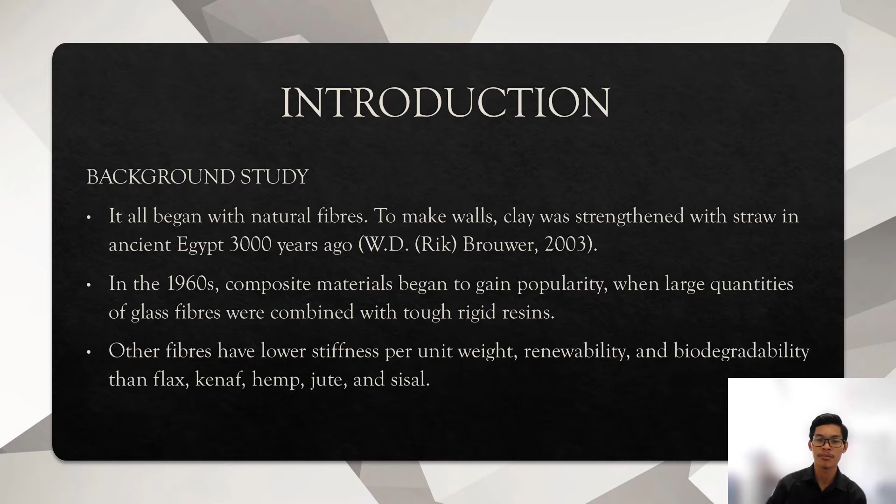Other fibers have lower stiffness per unit, renewability and biodegradability than flax, kenaf, hemp, jute, and sisal. Natural fibers are less expensive than synthetic fibers and may be used in application where cost trumps strength. Okay, next is the problem statement.

For this experiment, Bemban has a lot of potential. It is easy to find and can be found anywhere throughout Southeast Asia and mainly used for handicraft products as well as the tiles. Bemban plant has a lot of potential on becoming a good natural composite as kenaf and jute due to its high strength, high durability, high flexibility, and will not easily damaged by water. Regardless, there is no precise knowledge on how to correctly handle the Bemban plant.

To begin with, the Bemban plant has a few characteristics that make it a great natural composite. It contains minimal sap and it is simple to process. However, there are few studies to analyze on the strength, water absorption, flexibility, fracture, and failure process of the Bemban plant. So this study will be beneficial to the commercial and industrial sector when the strength, toughness, and the degradation factor has been known.

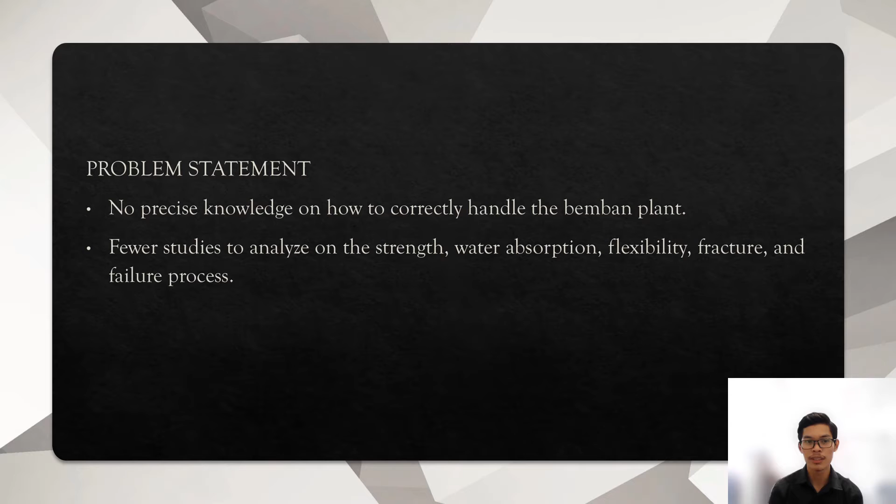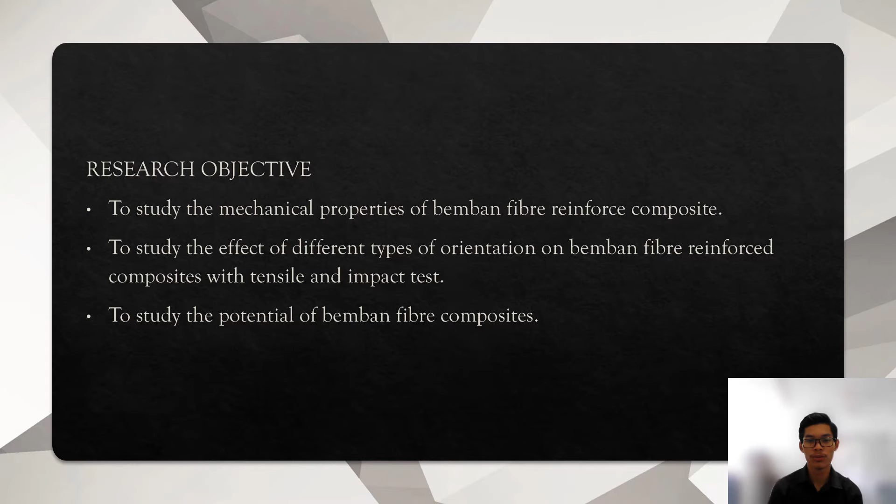Moving on to the next slide is the research objective. Basically, there are three types of research objective, which is the first one will be to study the mechanical properties of Bemban fiber reinforced composite. Second is to study the effect of different types of orientation of Bemban fiber reinforced composite with tensile and impact tests. And finally, to study the potential of Bemban fiber reinforced composite.

Okay, as for the scope of research, there are four, which is firstly the materials chosen for this experiment study are Bemban and thermosets. Next, this experimental study is focusing on three types of orientation of Bemban fiber reinforced composite, which is unidirectional, woven, and also random.

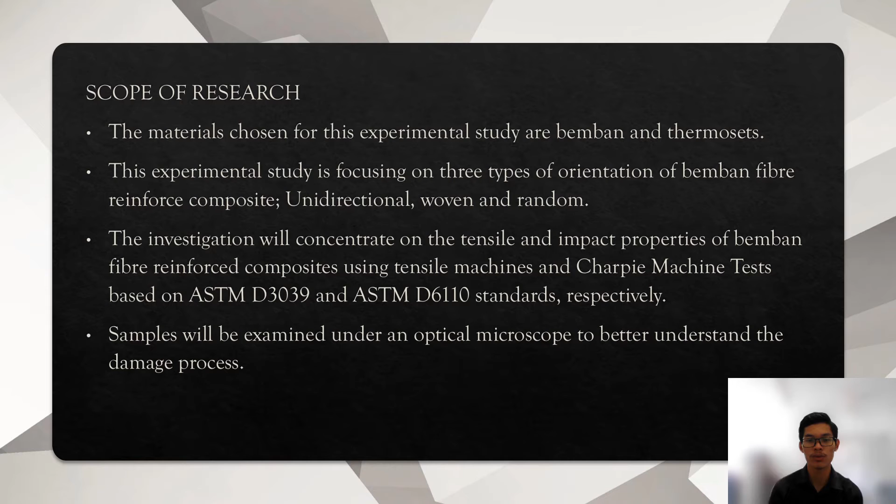The investigation will concentrate on the tensile and impact properties of Bemban fiber reinforced composite by using the tensile machine and Charpy machine tests based on ASTM D3039 and ASTM D6110 standards respectively. And lastly, the samples will be examined under an optical microscopes for better understanding the damage process.

Okay, for the literature review, I will explain about the first thing, which is the Bemban. So Akhmad Syarief in 2017 stated that Bemban is another type of plant from Marantaceae family that looks like a bamboo tree that grows in Malaysia. The morphology of this plant is that the leaves are oval in shape with parallel veins at the end of the stem and are green. It often grows in areas of shrubs where there is moisture suitable for clumping.

Although this plant is not considered as a food crop to be commercialized, the existence of this plant is always utilized by the villagers. At first glance, this Bemban tree is a kind of clump plant with a stem that looks like bamboo tree, but it has no segments. The relatively large oval-shaped leaves have a beautiful glossy surface.

The stem features a tall stem with the leaves located at the tip of the stem, where the flowers are white and produce a weak fragrant odor. The fruit is round and small in size. Fruits are globoid to ellipsoid in shape and slightly hairy and whitish in color.

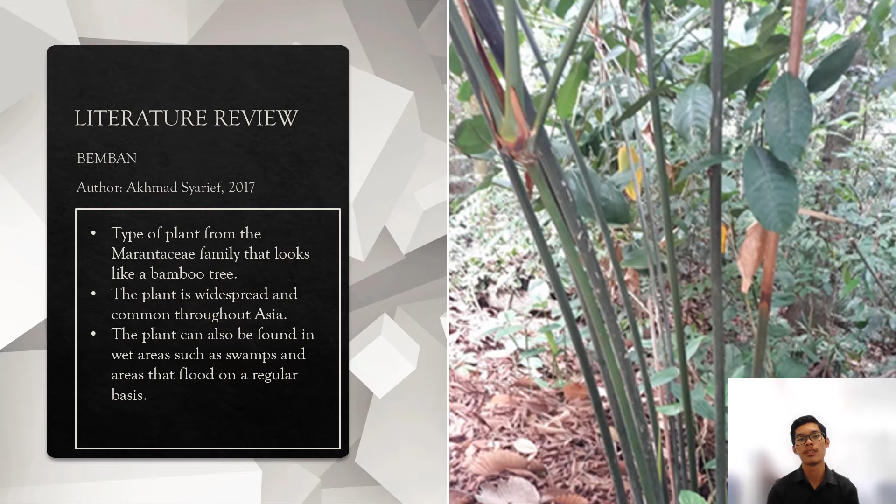It is fairly common, particularly in open and crowded areas. The plant can also be found in wet areas such as swamps and areas that flood on a regular basis. In Southeast Asia, it grows up to 1000 meters of altitude, not only in secondary forests, thick forests, and bamboo forests, but also in coconut plantations and near paddy fields.

Okay, next will be the composite. Ngo T in February 2020 stated that a composite material is a material that is made up of two or more materials that have better properties than the individual components when used separately. In contrast to metallic alloys, each material retains its own chemical, physical, and mechanical properties. The two components are reinforcement and matrix.

Composite materials have a high strength and stiffness mixed with a low density, allowing for a weight reduction in the finished item as compared to bulk materials. Strength and stiffness are provided by the reinforcing phase. Typically, the reinforcement is tougher, stronger, and more rigid than the matrix. Fiber or particulate is commonly used as reinforcement. Particulate composites have essentially identical diameters in all directions.

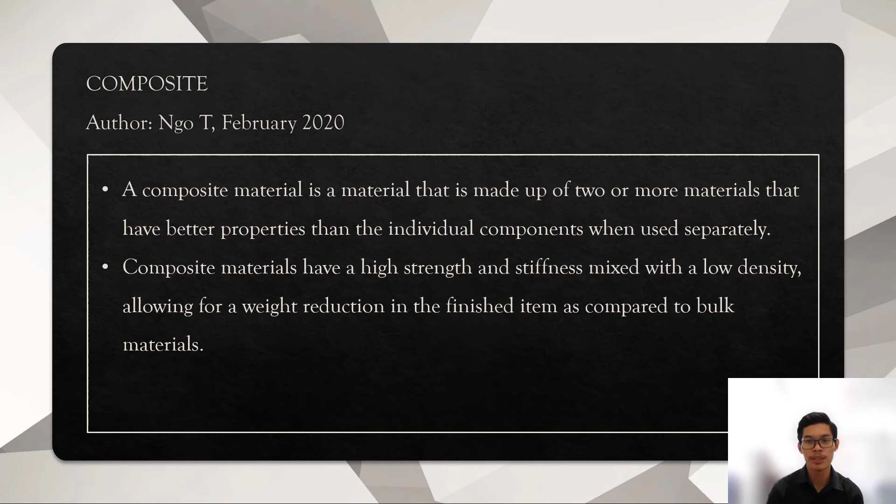Particle composites are weaker and less rigid than continuous fiber composites, although they are typically less expensive. Particulate reinforced composites often have less reinforcement due to processing challenges and brittleness, which is up to 40 to 50 volume percent.

Next is the effect of fiber orientation on composite impact and tensile properties. Jin-Woo Kim in May 2010 stated that the position of the fibers themselves, or fiber orientation, determines how much reinforcement improves strength, elasticity, and manufacturability. Injection molding fiber orientation refers to how individual fibers are arranged in fiber reinforced polymer composites to facilitate optimal structure arrangement.

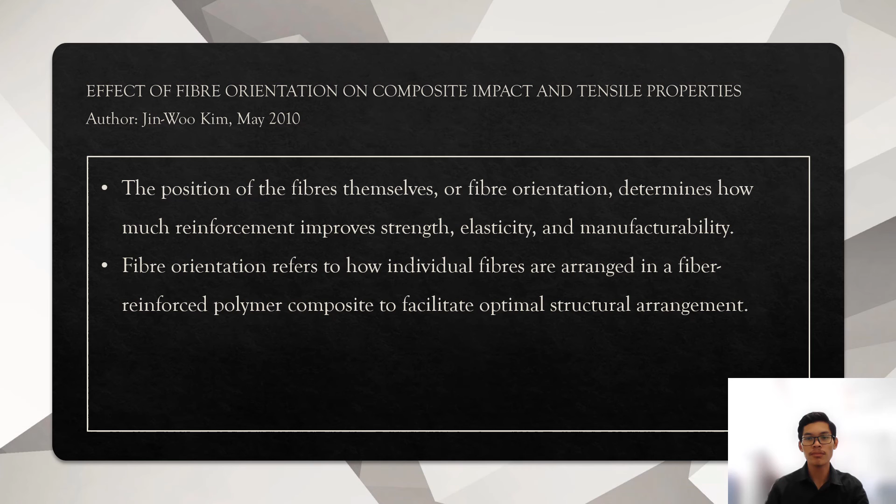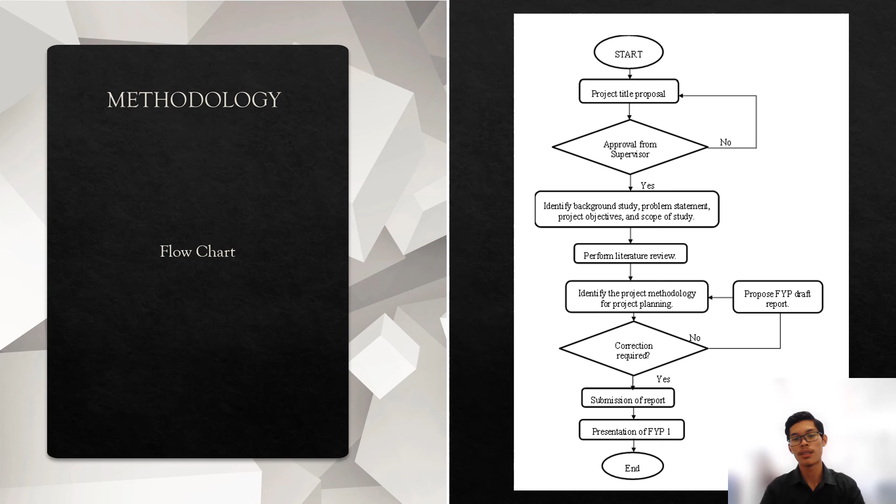After that is to identify the project methodology for project planning. If there is no correction, the report will be submitted and the presentation of the FYP1 will be held.

Next will be the experimental setup flowchart. First of all is to process the raw Bemban, and then the Bemban fiber will be mixed with the thermosets. After that, there are three types of orientation, which are unidirectional, woven, and also random. After that, the tests will be held, which are the tensile test and also impact test. After that, the result will be examined by using the optical microscope.

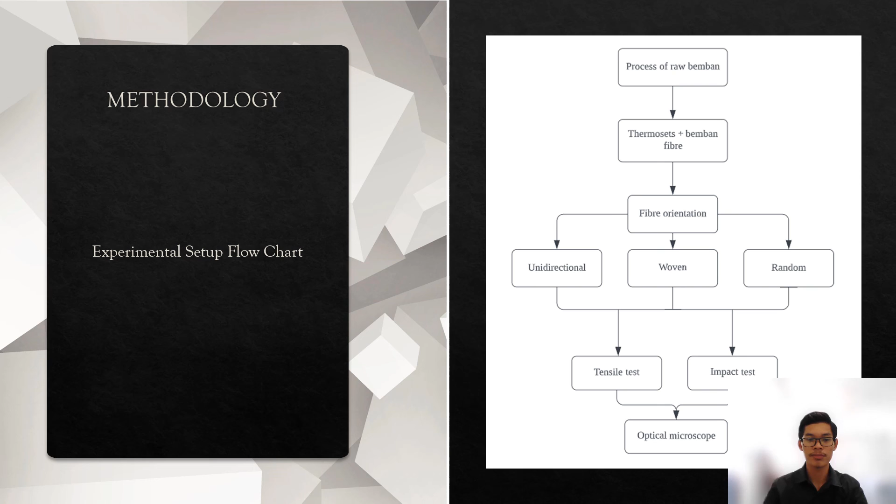So basically, this is the process of raw Bemban, where the stem is cut and the fiber of the Bemban is obtained.